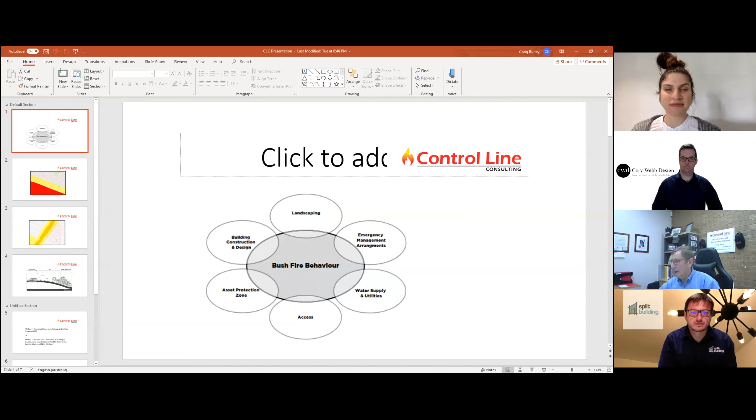So I'll just flick over to the PowerPoint here. I've prepared this - we're not going to kill you on PowerPoint, but I'm just going to run through basically where we end up, how we get to the outcomes and the inputs to it. And they're not just restricted to construction.

This little diagram, we actually designed in our first university course back in '03. The inputs clearly shown to affect and mitigate bushfire behaviour are the building and construction for sure, the landscaping around your building, the emergency management, and a lot of what we would have heard during the last fire season - messages from the Rural Fire Service and fire authorities about what to do during those bushfire events.

The adequacy of the water supplies and utilities, being electricity and gas, access and egress we consider as well, and the asset protection zone - the area of the landscape around your building and how that's managed.

That distance of management will vary for every site, but we try to achieve a level of exposure that keeps a new building out of flame contact. Whereas we do understand that there are existing parcels of land, such as Demir's, where you're not able to achieve that distance of separation from the vegetation hazard, and we end up in those higher levels of exposure.

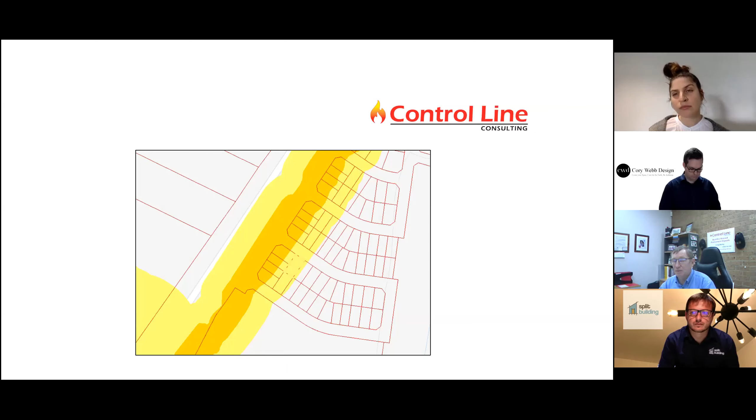As a sidebar comment, there's talk through the Royal Commission that the buffer zones should be expanded out to 150 metres, but whether that happens or not is another thing.

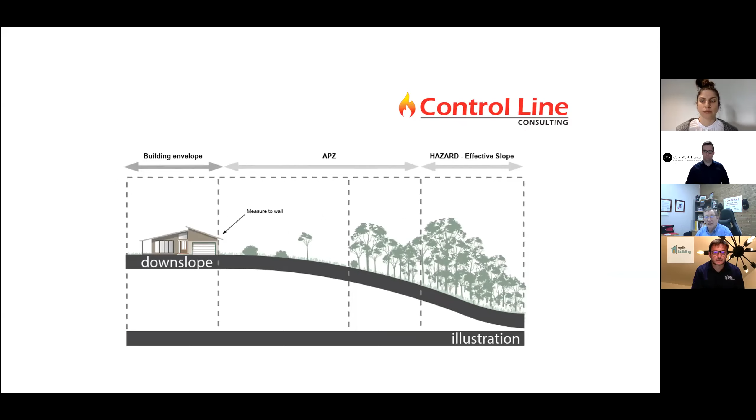In terms of the process for how we assess a development, this diagram is a takeout of the current Planning for Bushfire Protection 2019. On the left-hand side you can see the house you're proposing to build, then the area of separation, shown as the potential asset protection zone, and then the area of hazard.

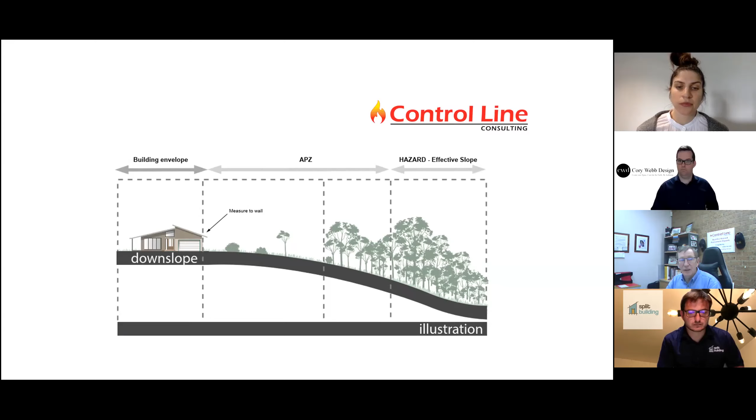To establish what our BAL level is going to be, we look at where the development is located, the separation and distance, or asset protection zone achievable distance. We then look at the hazard and what sort of hazard that is, divided into about 8 different groupings for all the vegetation in New South Wales. We then look at the slope through that vegetation. When we look at those input factors, which obviously differ for every site, we end up with a BAL level, a bushfire attack level.

There are 2 different methods for assessing what that BAL level is and the outcome for it. The most simplistic is what we call a method 1 analysis, where we just look at separation distances and the type of vegetation. It works off a simple table and ends up with a BAL.

Or we can use what's called a method 2 analysis, where we're trying to really fine-tune that assessment process. There are factors that need to be taken into account—the actual slope may be such that we want to look at it in the context of a specific site. Maybe the fuel loadings out in the vegetation hazard area are such that they need to be further analysed, because different vegetation has different fuel loadings and may not, in a specific instance, be pertinent to the vegetation grouping that arises out of a method 1 analysis.

There may be a variation in the flame width approaching your house. Method 1 assumes 100 metres, but in some circumstances it may only be 20 metres of potential flaming front coming towards your building. So we can run it through software programs and come up with a more detailed analysis for a specific site if that's required.

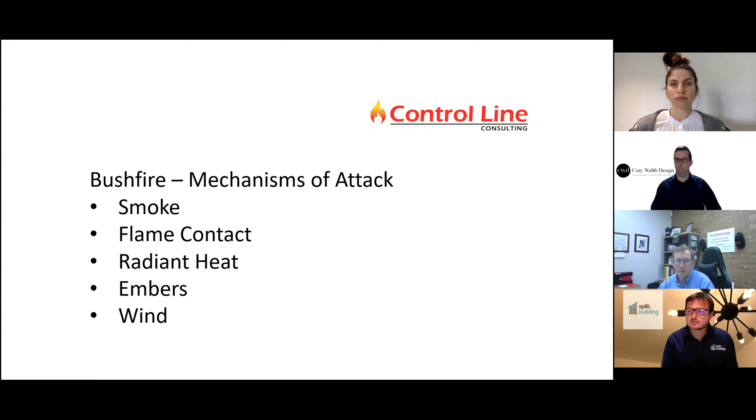So that's a significant component of what we need to do in terms of protecting our building from those elements.

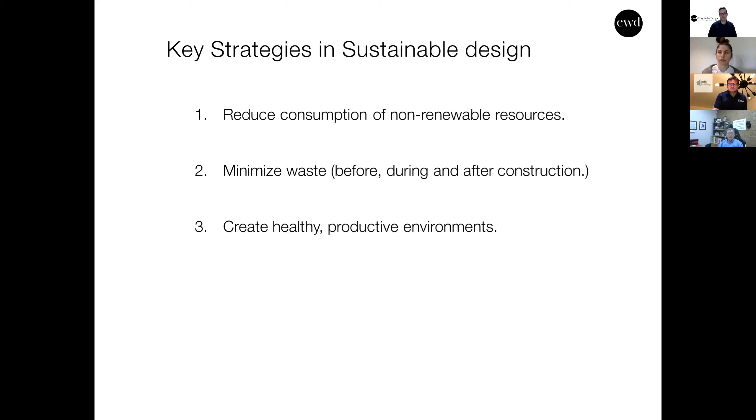First of all, we are seeing that there's a need to make a personal contribution to change the effect they're having on the climate, and also we want to be more and more resilient to the fire seasons, the extreme weathers that we're facing all over Australia. But some of the basic strategies of what sustainable design includes are these three, and you can Google it and study it to find out a lot more detail on this, but some of the basic ones are: reduce the consumption of non-renewable resources, minimize the waste, so both before in the design stage, during construction, and then also when we're living in the house, and then to create healthy and productive environments.

This crosses over really well with sustainable design, because 40% of your energy bill comes from heating or cooling your house. The main way we waste heating or cooling is by having large gaps in the outside envelope of our house. That can let cool air in when we're trying to keep it warm, or the opposite. So this is a really good way they work hand in hand, by building to these tight tolerances.

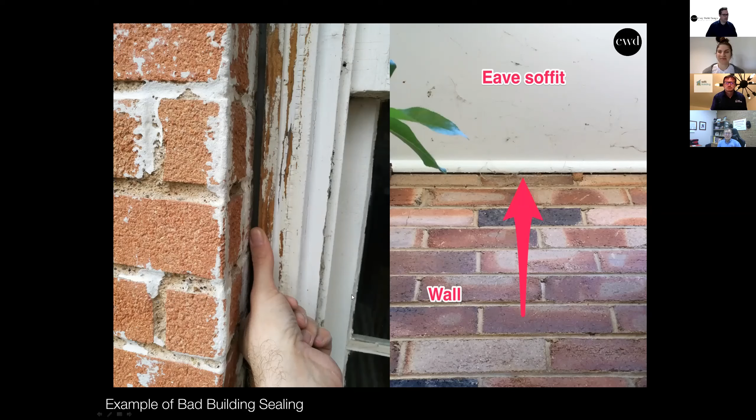A little practical design tip for when working on your existing or new house: use high quality door seals on external doors and windows, especially doors, because that will reduce air leakage from your house design. Internal doors often have an undercut because there's ventilation flowing around your house from different rooms, but the external doors are really important to seal.

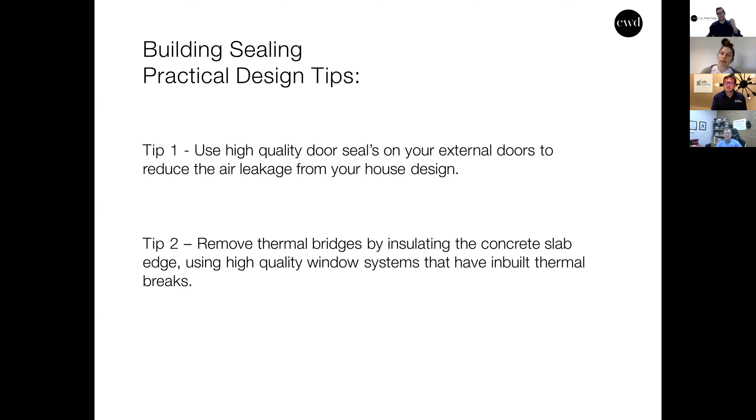Secondly, talk to your designer about how to remove thermal bridges in your house design. This could include insulating your concrete slab edge, and we highly encourage using high quality window systems that have inbuilt thermal breaks. This means in the window frame there's either a rubber gasket, an air gap, or timber that stops the flow of heat transferring through your building.

Window design is also a second area where they crossover. Windows are obviously very vulnerable in a bushfire situation, as Craig has mentioned. The old traditional single glazed aluminium windows we probably all grew up with just sometimes don't cut it, especially not in bushfire compliant houses. Some basic principles are that we don't want window frames to be combustible, we want the gaps around windows well sealed, and sometimes we might leave the window open but have a wire mesh in there to stop embers getting in, or in some cases use bushfire shutters. So how does that work with sustainability?

Well, with sustainable design, you really want high quality glazing, because single glazed windows can transfer heat and cold through our building so easily. So tip one with practical design tips is use triple glazing, or at the very least double glazing, to control the thermal quality in your house. Your automatic reaction is probably, that's too expensive, I can't do it. So the other tip is how to balance the cost of using these higher spec windows.

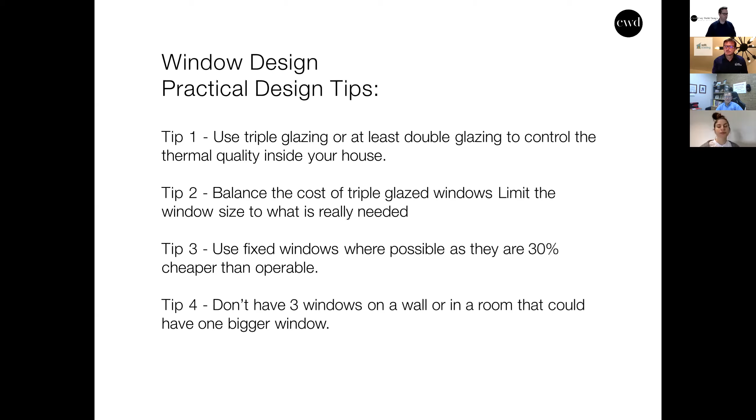So let's look at our third area, bushfire shutters, and have a look at a working example of how bushfire shutters actually work as a design principle, sustainably, really well.

This is Folding House that we're working on up in Glenbrook. It's about 2 or 3 months away from construction starting. It's got a west-facing view, which normally you avoid like the plague because the summer sun comes belting in, heats up your house, and creates a little oven. So to mitigate that, we've put 2-metre eaves on the west-facing windows.

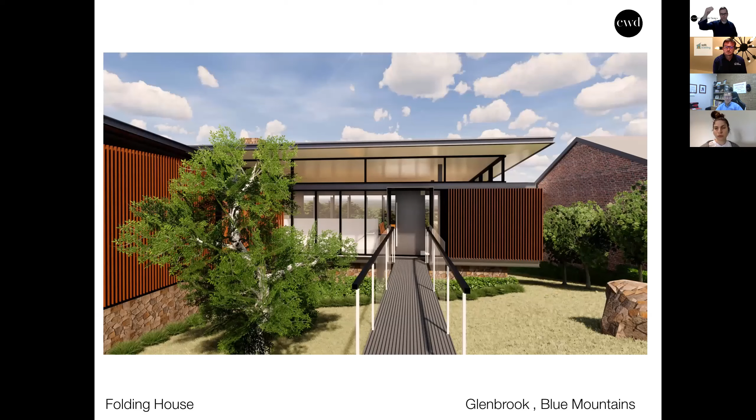We've got large windows to take advantage of the view, then a pergola with terrace, and motorised mesh screens that drop down and also act as insect screens. And then also the bushfire shutters.

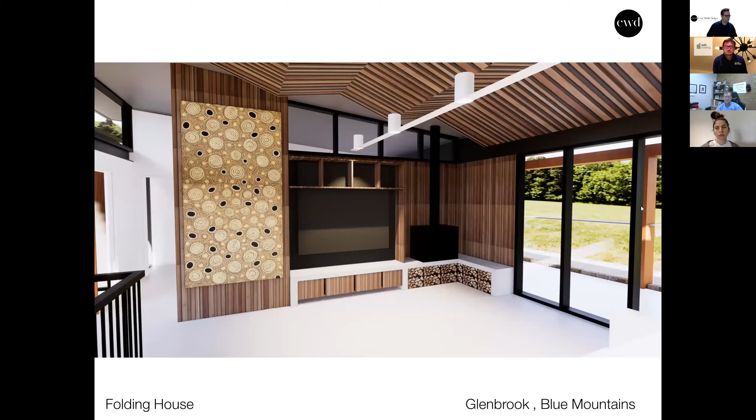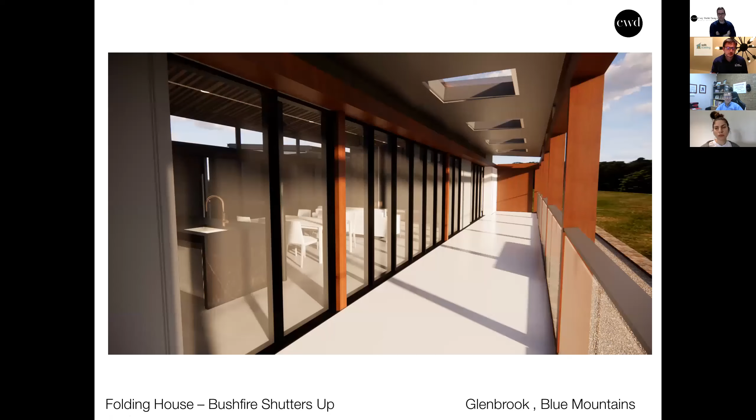So in summer, when the sun comes down and hits these windows, it's going to heat up the house. But when you close the bushfire shutters, all of a sudden it's got this huge barrier to the heat getting into your house. And the way this controls the sun is even more efficient than triple glazed windows.

So in this house, we've actually got a balance of bushfire shutters with flame zone windows and double glazed windows, to be able to balance how the house works thermally and really optimize it.

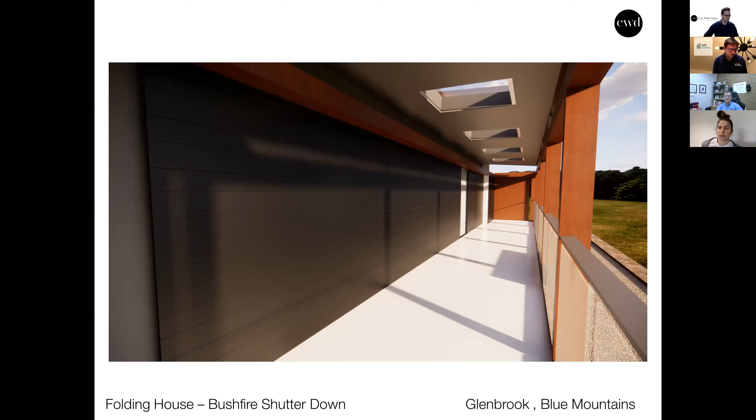You can also automate your bushfire shutters so that as the sun moves around your house, and on certain days, sensors inside will automatically close and open them to keep your house at an optimal temperature. As Craig's mentioned already, we don't need bushfire shutters on BAL 29 because the windows will perform adequately.

Tip two: there aren't any skylights certified in Australia for BAL flame zone. So when you're doing your initial planning, make sure all your rooms have access to an external wall so you can get natural light in, because you can't use a skylight.

We'll just skip quickly through some of the different styles you can have. It's not just one set style you have to have for a bushfire house. Here we've got a modern house — this DA was just approved 3 weeks ago — with a real clean, modern palette, hip roofs, and pretty standard construction.

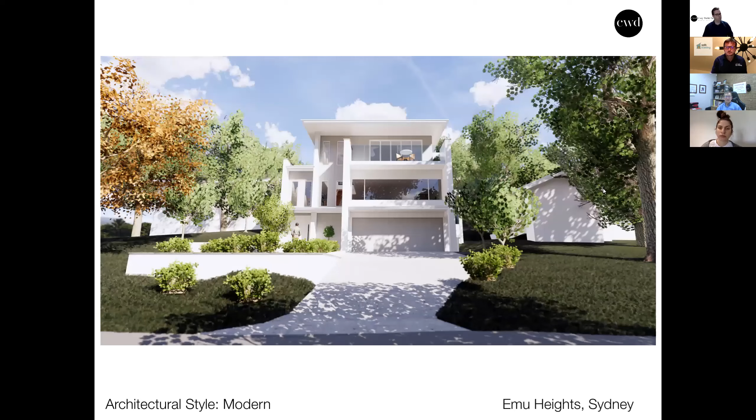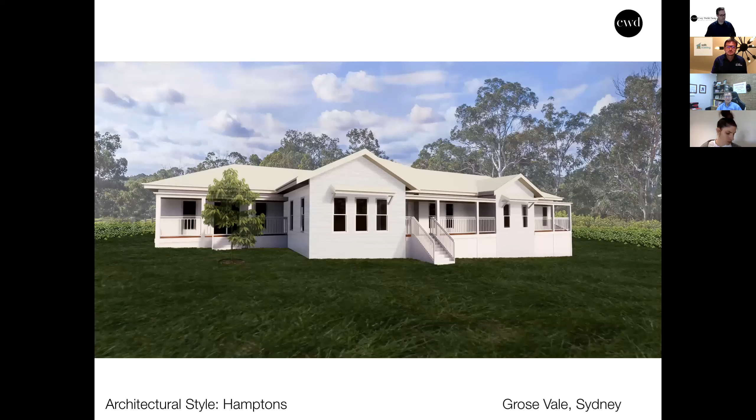One that's under construction now at Grose Vale is a Hampton style, so it's got a beach vibe, white on white styling, rustic interior features. And the house we've just been talking about, Folding House, is contemporary.

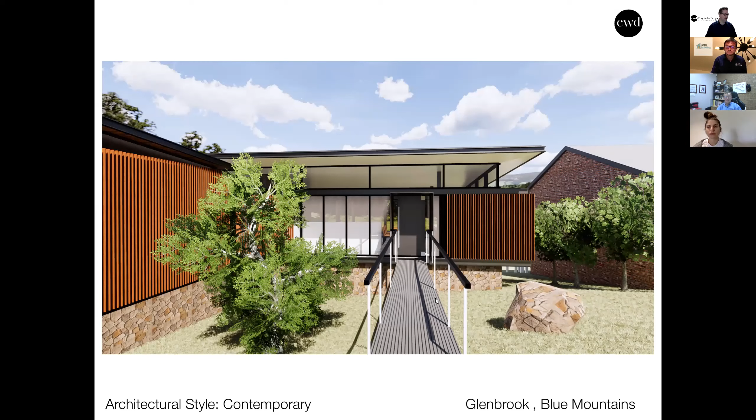We'll also look soon at Demir's house. We didn't design this one, but it's got some really excellent, minimalist design, with polished concrete, simple clean geometric forms, and a really high quality build.

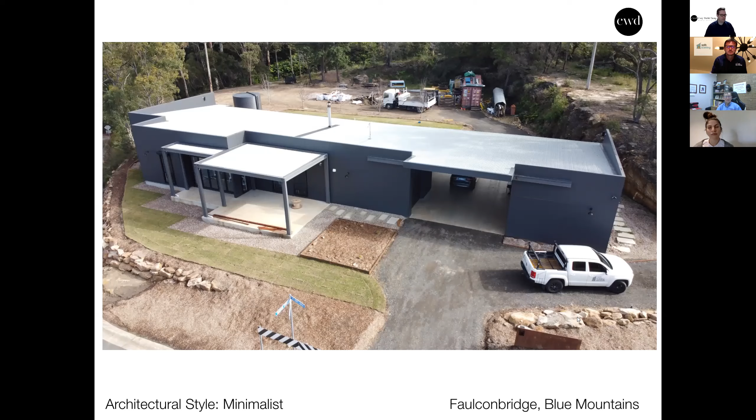So just skip through those quickly just to show that we're able to achieve quite a number of different styles in bushfire compliant and sustainable design.

Now we'll just touch on very briefly, cost, just to balance out the functionality that we want to include in our houses and the cost of it.

Some practical design tips: pay a builder to be involved in the design process. He'll be able to help guide you to get your budget to where you need it to be, and also reduce costly variations because he was involved in the design decisions.

Tip 2 is think about the cost that your building is going to have through its whole life. Not the construction cost, but how much is it going to cost you to run for 20 years of the life that you live in it. Sustainable inclusions like solar panels, high quality windows, sometimes they can take only 5 to 7 years to pay for themselves through the reduced energy bills that you get. So it's really worth considering that whole cost, because the initial construction cost is only about 15% generally of the whole life of a building.

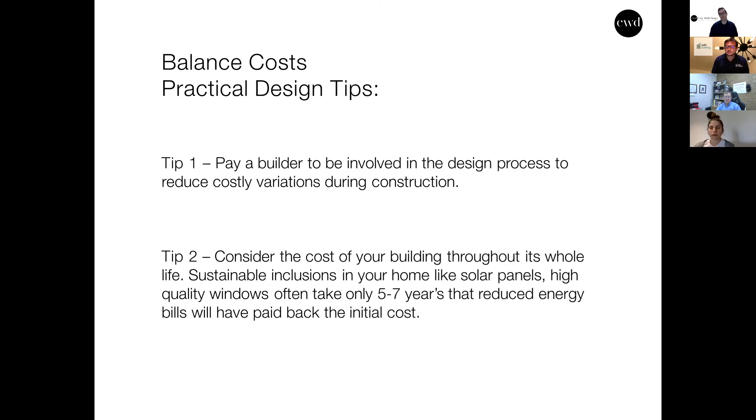The time that you can really make the best decisions and have the greatest effect on the whole life of building costs is at the design stage. So talk to your designer. It doesn't have to be me, but talk to them about how you can make sure you get natural ventilation, natural lighting, good quality insulation that's appropriate to your site location, the right type of window, because different glazing works in different locations, and help reduce the running costs of your house, because it reduces it exponentially.

Just to finish off, we've seen the climate change and the extreme weather events that are related to bushfires, and that's a very obvious link. It would be illogical in the design of our homes to ignore these two critical issues of bushfire compliant design and sustainability. So Cory Webb Design, in hosting this webinar, we'd love it if just one person made a more sustainable design choice after viewing this webinar. That would be worth it for us.

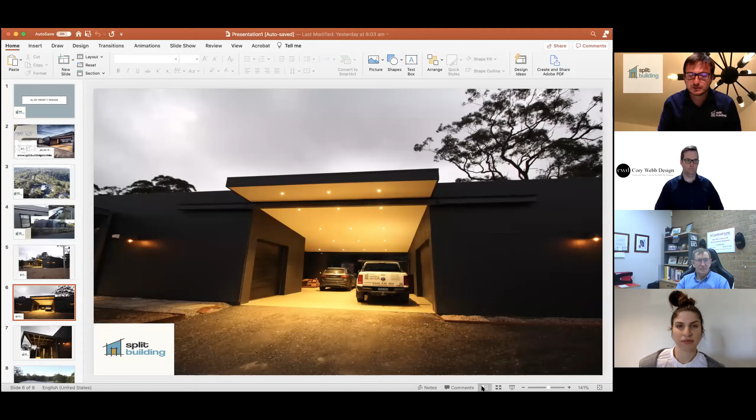Yeah, okay, I think I'll start at the start. Sorry. I guess as...

One of the most leading questions was, how did we come up with a design? Being one of the most memorable questions I've got, I can say for me, look, I already knew a lot about putting a building together, but when it came to actually getting it ready and presented for DA and needing some really incredible details added to it, I needed to turn to an architect or a designer. After interviewing a few, I met up with one architect, and it was an interesting conversation because basically 8 hours later that night, we had a pretty good outcome. Maybe about 80% of that planning was done, which was pretty incredible, and it gave me a whole another level of appreciation for architects and designers. So that was actually a really good experience. I loved it, yeah.

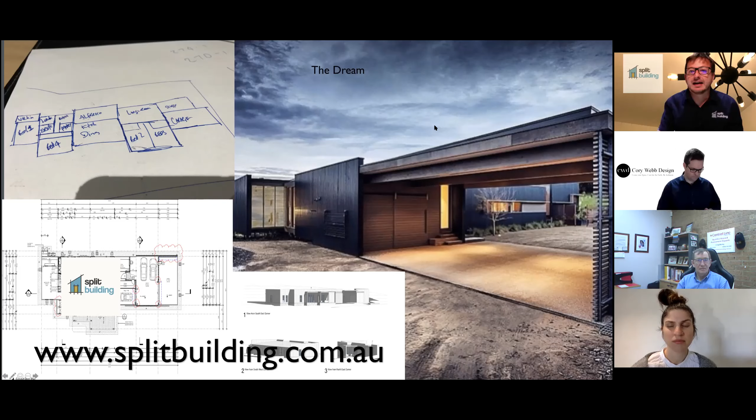So I guess, yeah, I had a lot of thinking to do when designing this home, and there was a lot of different choices in building materials that I had to make.

The primary building materials I was thinking about from the start were tilt panels and SIPS panels, which is a structurally insulated panel. There was also a product called Dincel, or double brick render, brick veneer, or just a cladding that goes over your timber frame. But I had to make sure I could afford it, so I broke down all the materials into a square meter component to see if we could get it into some kind of budget we had in mind.

When I was thinking about tilt panels, I ended up shying away from them because, due to the cost and difficulty in obtaining the right finishes, the expansion joints were a bit of a put off. I wanted an industrial look, but in residential construction I didn't think it offered the detail I was looking for. I was also a little scared of a tilt panel falling on us and maybe killing us, so there was a safety aspect there.